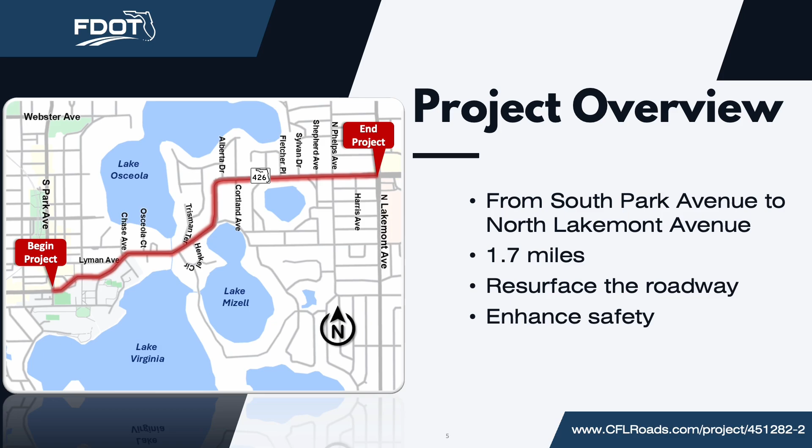FDOT began a coalition project in 2022 with a goal of determining additional improvements that could be added to a planned resurfacing project. The coalition project consisted of government partners and multiple community partners. The coalition relied on these community partnerships and considerable grassroots engagement to develop ways to enhance safety on the project corridor.

Looking at traffic data and listening to community experiences, the coalition project identified several concerns along the corridor, including speeding, lane departures, a lack of crossings for bicyclists and pedestrians, lighting, sight distance, and signal timing. This led to the development of 4 key areas of focus: traffic calming and speed reduction, improving safety through the curves, enhancing mobility and connectivity for pedestrians and bicyclists, and providing safer turning movements.

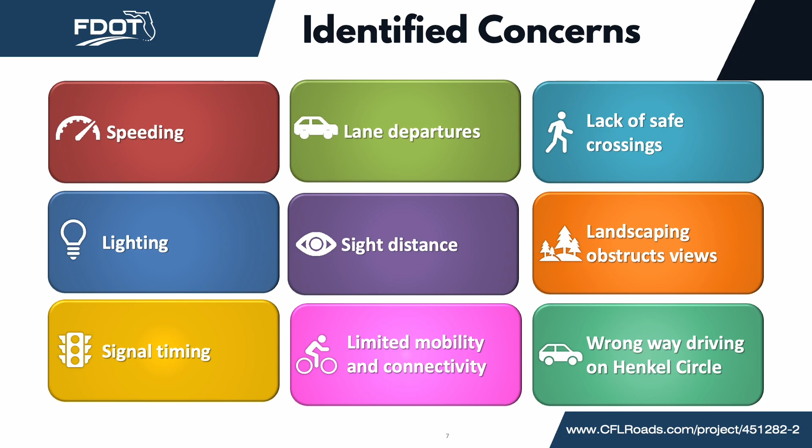The team engaged extensively with the community, not just to share information, but to gather input and find the right solutions together. Potential solutions were considered at visioning team meetings and 2 community events. Through feedback gathered during this outreach, the coalition project team developed a concept with the preferred approach. The design plans shared at this project open house are a direct result of the advocacy, passion, and partnership of the FDOT, government partners, and the community.

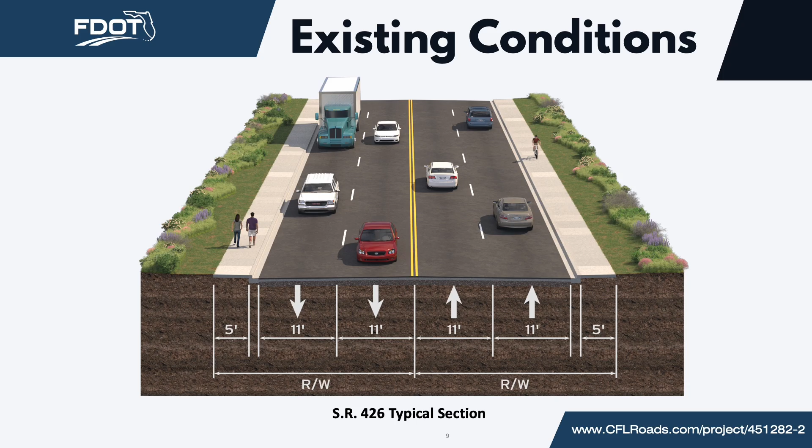Currently, State Road 426 is a 4-lane arterial roadway with a posted speed limit of 30 miles per hour and advisory speeds of 25 miles per hour through the 2 horizontal curves. The existing typical section or cross-section of the roadway has 2 11-foot travel lanes in each direction, with curb and gutter and adjacent 5-foot wide sidewalks on either side for the majority of the project limits.

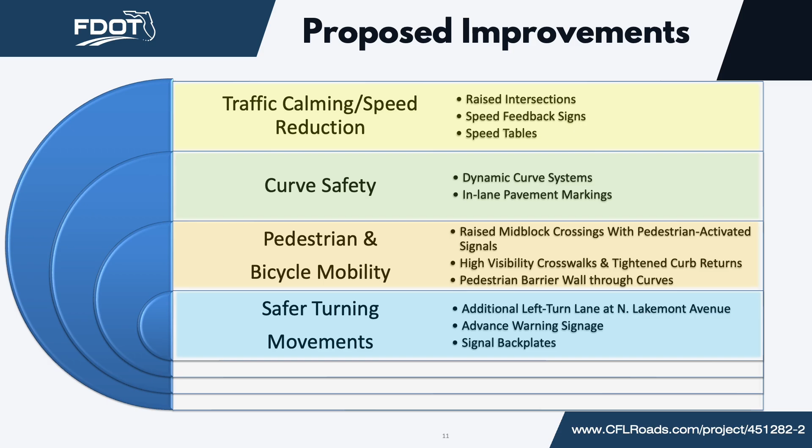Using all available data, the coalition project determined the 4 areas of concern and identified many potential solutions, such as raised intersections, speed feedback signs, and speed tables to calm traffic and reduce speeds; dynamic curve systems and in-lane pavement markings to improve curve safety; raised mid-block crossings with pedestrian-activated signals, high-visibility crosswalks, tightened curb returns, and pedestrian barrier walls to enhance pedestrian and bicycle mobility; plus an additional left turn lane at North Lakemont Avenue, advance warning signs, and signal back plates to facilitate safer turning movements. The following slides will demonstrate how some of those solutions have been implemented in the final design.

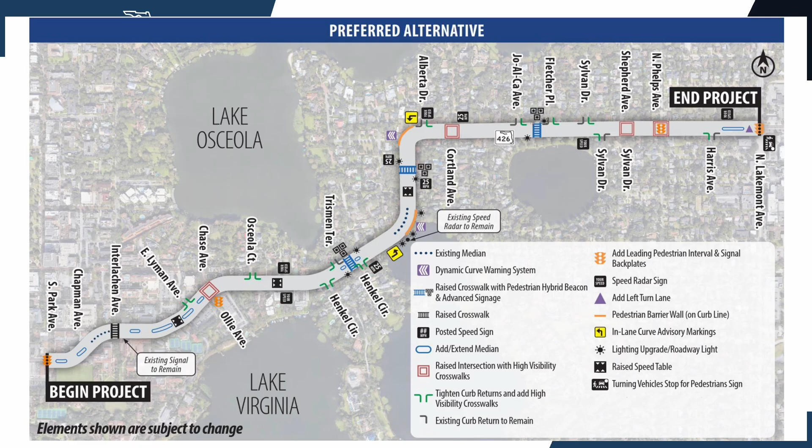4 raised intersections with high visibility crosswalks are proposed for this section of State Road 426 at Chase Avenue, Cortland Avenue, Shepherd Avenue, and North Phelps Avenue. Raised intersections are designed to reduce speeds while improving pedestrian safety by raising pedestrians approximately 4.5 inches off ground level to improve visibility. These proposed changes are illustrated in this conceptual rendering of the existing conditions and the proposed improvements for the intersection at Chase Avenue.

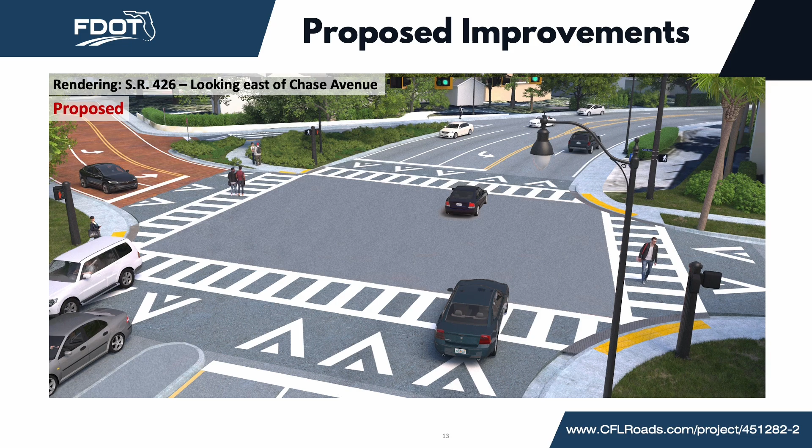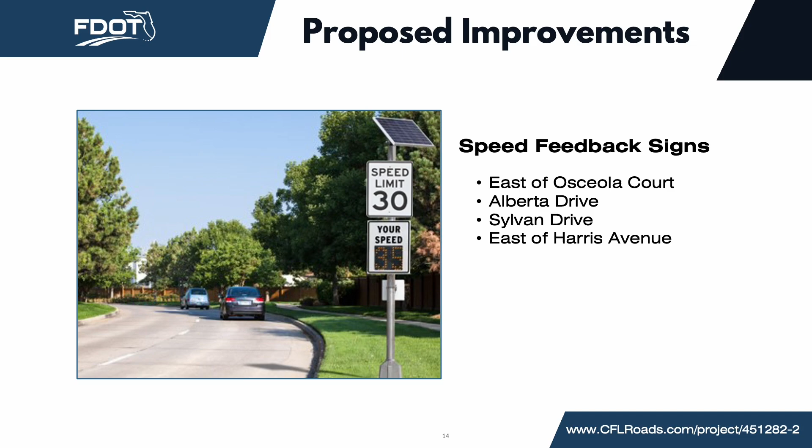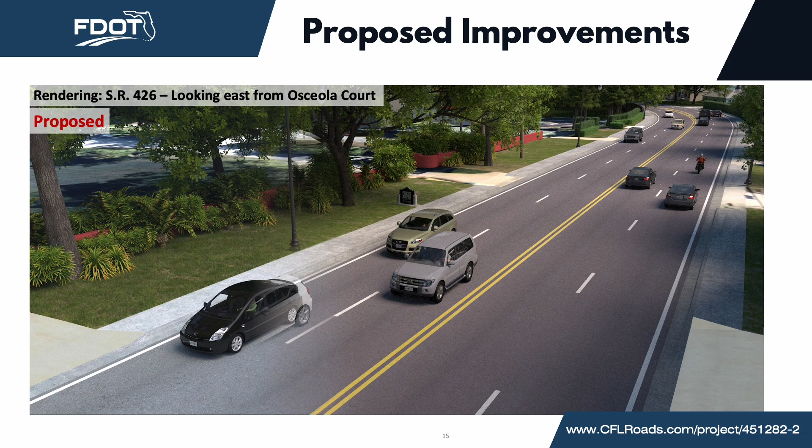To encourage safer driving speeds throughout the corridor, FDOT proposes the installation of speed feedback signs at the following locations: east of Osceola Court, Alberta Drive, Sylvan Drive, and east of Harris Avenue. 3 raised speed tables are also proposed, west of Lyman Avenue, east of Osceola Court, and south of Trisman Terrace.

This artist rendering of State Road 426 between Osceola Court and Henkel Circle illustrates a proposed speed table, which is a gentle bump that will serve to calm traffic along the corridor. This design was developed while specifically taking emergency vehicles into consideration. Other median islands are planned along the corridor, where possible, to calm traffic speeds without affecting access to any side streets or properties.

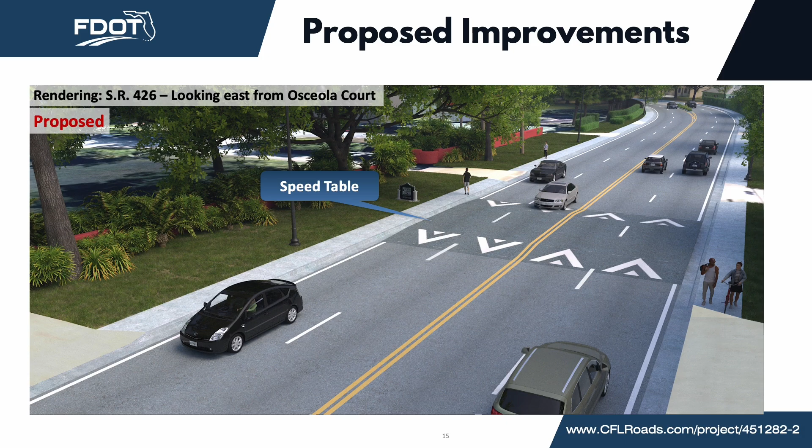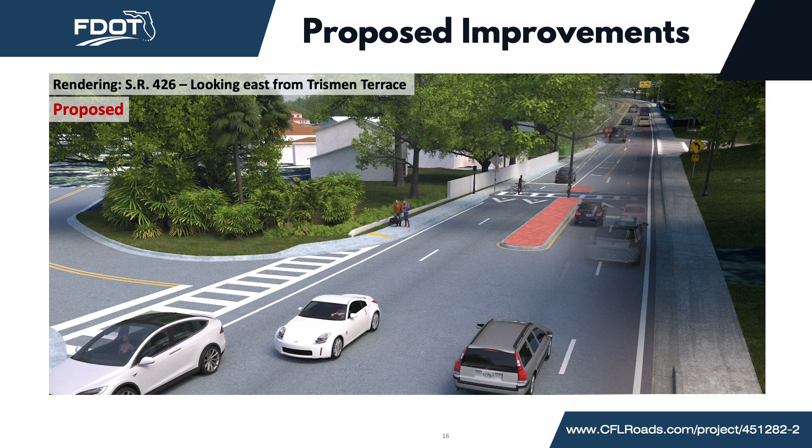3 signalized pedestrian crossings will provide improved pedestrian connectivity and safe crossings to local destinations. A raised mid-block crosswalk is proposed at Henkel Circle, Trisman Park, and west of Fletcher Place. These crosswalks will have pedestrian-activated signals called pedestrian hybrid beacons, or PHBs, and clear signage for pedestrian safety.

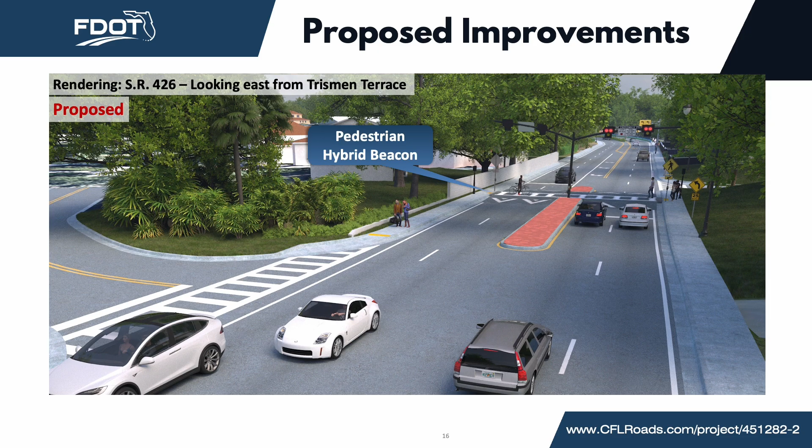These before and after conceptual renderings, looking east from Trismen Terrace, highlight the raised crosswalk with a PHB, as well as a new center median island with a pedestrian refuge area. Each PHB crossing will include high-visibility crosswalk markings, pedestrian push buttons, advanced stop bars, and Americans with Disabilities Act or ADA accommodations.

A dynamic curve system with enhanced lighting is proposed at the Brewer Avenue curve and the southern curve east of Henkel Circle. A dynamic curve system is an LED lighting system engineered to maximize safety on a curve by increasing visibility, raising driver awareness, and encouraging safer driving speeds.

Additionally, this rendering looking west at the Brewer Avenue curve illustrates other planned safety features, which include in-lane decals, a new speed radar sign approaching the curve, and a pedestrian barrier wall at the outside curb line, which provides extra protection for pedestrians.

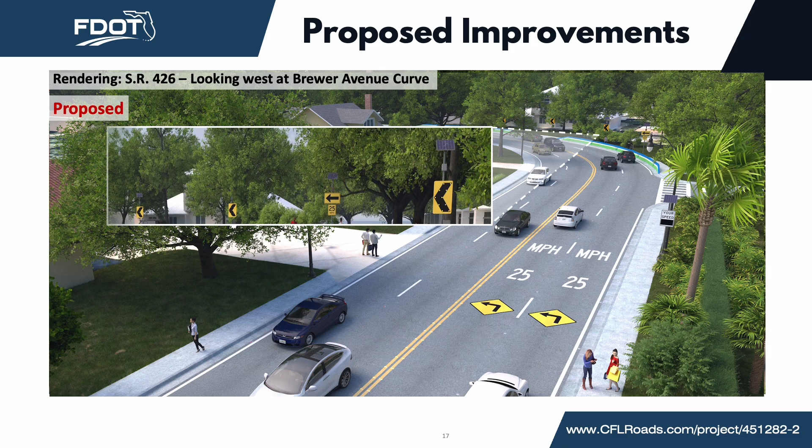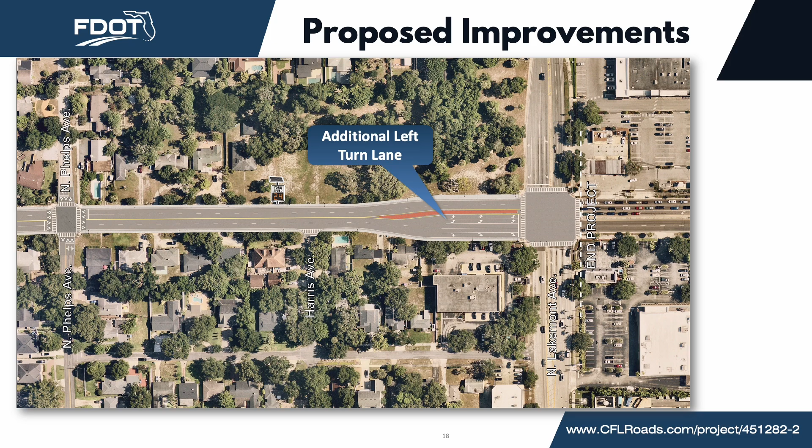And finally, the existing median separator at the west approach of the intersection at North Lakemont Avenue will be reconstructed to allow for an additional left turn lane. FDOT also plans to reconstruct the retaining wall between Fletcher Place and Sylvan Drive.

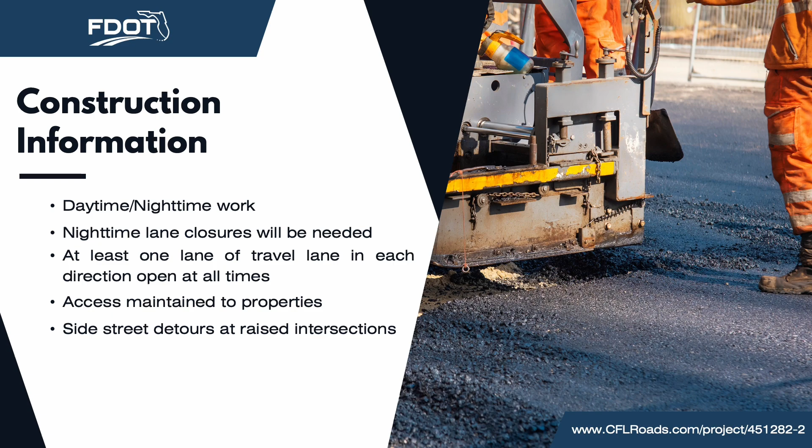Once construction begins, please expect work to occur all times of day, with lane closures limited to nighttime only. When lane closures do occur, at least one travel lane in each direction will be open at all times. Access to all properties will be maintained during construction. Temporary overnight side street detours will be needed to build the raised intersections.

During construction, temporary sidewalk closures will be needed, but pedestrian connectivity will be maintained. Pedestrians will be directed to safe crossing locations to move around the work zone.

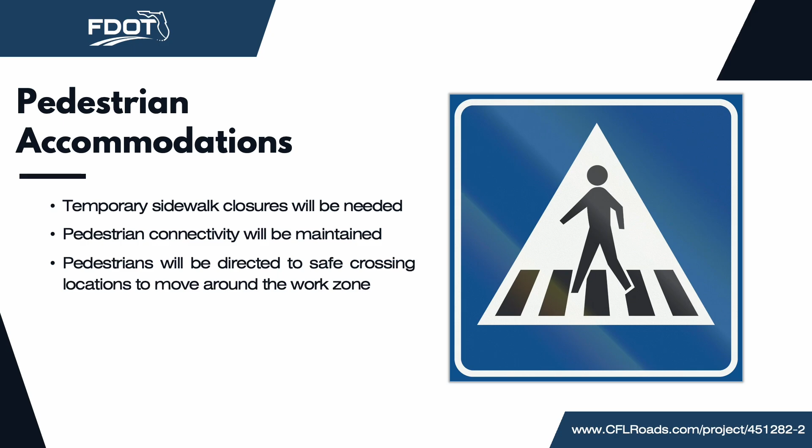The design of this project will be completed in late 2025, with an estimated cost of $2.67 million. All proposed improvements are located within the existing right-of-way. Construction for this project is funded for early 2026, with an estimated cost of $9.4 million.

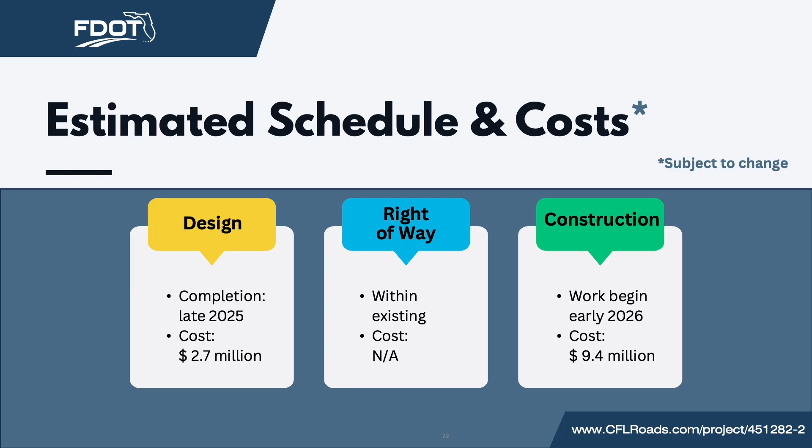Your feedback is important, and we want to hear from you. You may speak directly to project team members, submit written questions or comments, or provide comment through the project website, www.cflroads.com/project/451282-2 or during the webinar. While comments and questions are welcomed at any time, those submitted by February 18, 2025 will be included in the public record for this open house.

You can also reach FDOT Project Manager Martina Paradise directly by email at martina.paradysz@dot.state.fl.us or by U.S. mail at the Florida Department of Transportation, 719 South Woodland Boulevard, Mail Station 542, DeLand, Florida, 32720. You may also call Ms. Paradise at 386-943-5466 to provide verbal comments during normal business hours.

This public meeting was advertised and is being conducted in accordance with state and federal requirements, including Title VI of the Civil Rights Act of 1964. Public participation is solicited without regard to race, color, national origin, age, sex, religion, disability, or family status.